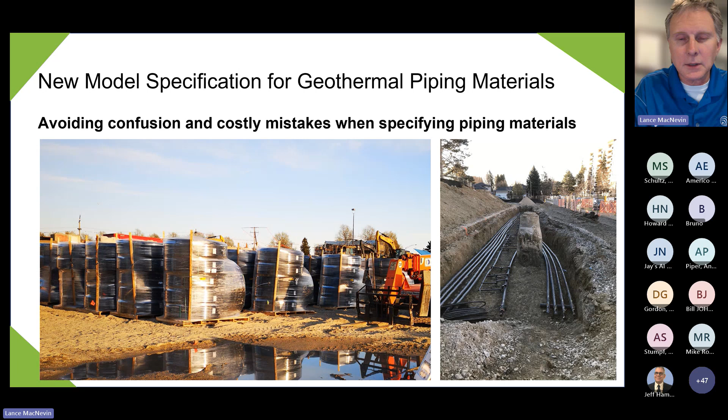Well, it can actually be pretty complicated. There's a lot of science and detail in pipes, and there's a lot of ways of specifying the pipes correctly. If you don't do it correctly, there is a chance that you get incorrect pipes put in the ground, which can obviously be very costly, almost impossible to replace sometimes, and could lead to premature failure if you don't have the right pipe in the ground. So that's kind of the background for this.

As Jeff mentioned, here's my specifications. I work for the Plastics Pipe Institute, which is a nonprofit trade association based in Irving, Texas. PPI has been around since 1950, before all of us were born. Our mission is to advance the acceptance and use of plastic pipe systems through research, education, technical expertise, and advocacy.

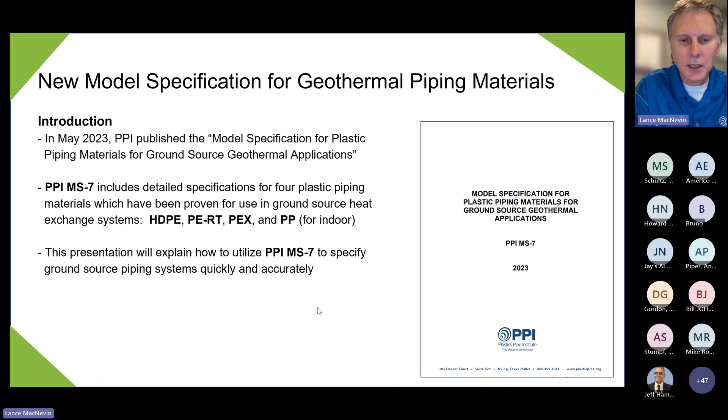As a bit of an introduction, what we're going to be talking about today is a new PPI document that published a year ago called Model Specification for Plastic Piping Materials for Ground Source Geothermal Applications. Hopefully the title is pretty self-explanatory. The official number of the document is PPI MS7, for Model Spec 7. That means we published 6 others beforehand. But this one is focused on the pipes that we're using in the ground for geothermal systems. So we're going to talk about why it's important to have a model specification and to use correct language, and then walk you through the document and show you how to actually use it correctly.

On our presentation outline here, we're going to start by focusing a little bit on the science and specifications of HDPE pipe, tubing, and fittings. We're going to first take a look at what the code requirements are for HDPE pipe, tubing, and fittings, and then delve into the standards requirements from organizations like ASTM, AWWA, CSA, and NSF, so that we understand how standards and codes and standard language work well together.

And then the fun part of this is going to be taking a look at some inappropriate or out-of-date piping specifications. These are real specifications used on projects in the last few years that, if you follow them literally, there might be no product that meets those requirements, or it may be very confusing in terms of which product to supply. So we'll take a look at those and point out what's wrong with them.

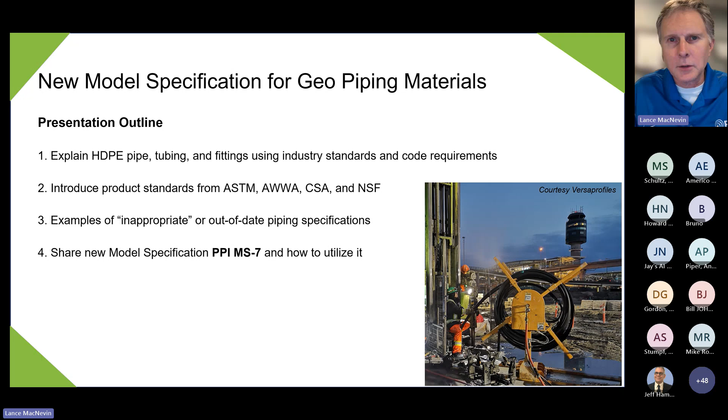And then finally, in item 4, we'll actually share the new PPI document and give you a tour of what's in there and how you can utilize it going forward, especially if you're a specifier or an engineer. But many of you are probably working with specifiers and engineers as well, and could share this information with them to make their life easier and your life easier too. So that's the plan—we've got these 4 items in the presentation.

So the first of these is we're going to be taking a look at the actual codes and standards, starting with the codes. You've probably all heard other presentations by different presenters describing what a code is, right? So this may be a little repetitive to some of us. But our definition today is that a code is a legally adopted document by a jurisdiction for the purpose of regulating a portion of the design and construction industry. So we have plumbing codes, fire codes, construction codes, mechanical codes, and then geothermal codes as well in some cases.

Most jurisdictions, whether that's my city, my town, or my state, don't have the capacity to develop their own codes, so they adopt model codes from big agencies like ICC, IAPMO, IGSHPA, or NRC up in Canada.

Some jurisdictions do develop their own codes, and sometimes that doesn't turn out for the best. They could end up being really out of date or ill-informed. So we generally encourage any jurisdiction to adopt one of the big model codes as their codes.

So the groups that write those so-called model codes are called code development bodies, or simply code agencies. Again, International Code Council is ICC, or the International Association of Plumbing and Mechanical Officials, that's IAPMO, and National Research Council of Canada, NRC, that adopts the construction codes for Canada.

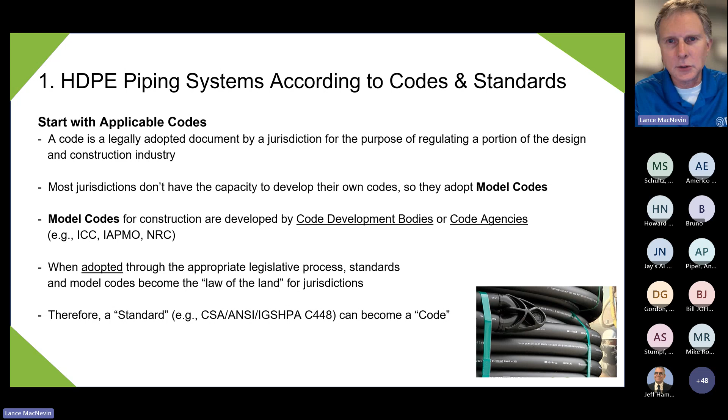So when a code or a standard is adopted through the appropriate legislative process, then the standards and model codes become the law of the land for the jurisdictions. And in some cases, something that's developed first as a standard, like CSA C448, can actually become adopted as a code when a jurisdiction, like a state or a county, says we're going to use C448 as the geothermal code for this territory. So that's just kind of an intro to codes.

In terms of what codes are out there for geothermal systems, there's primarily 4 of them in North America right now. There's the ANSI CSA IGSHPA C448, which Jeff was talking about, and Jeff is the chair of that committee within CSA, and we're looking forward to the new version being published soon.

And in the United States, we have the International Mechanical Code from ICC, and then IAPMO has 2 different codes that include geothermal content. There's the Uniform Mechanical Code and the Uniform Solar Hydronic and Geothermal Code that has a specific chapter just on geothermal systems. So we're going to take a look at each of these in detail.

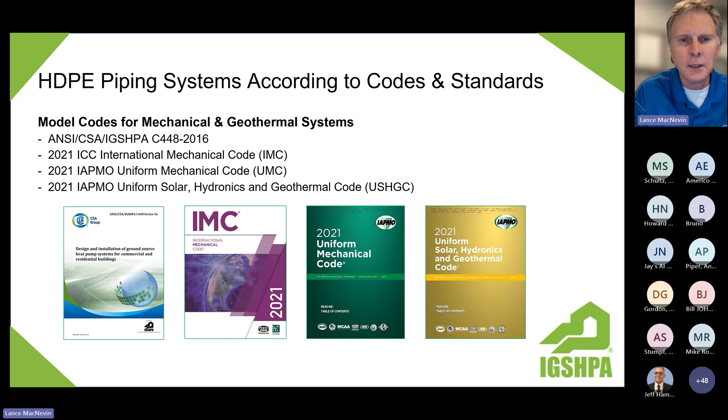For C448, it's the 2016 edition, still the current edition, reaffirmed in 2021. For the other codes, we're going to take a look at the 2021 edition in detail and see how those codes refer to piping requirements. This is kind of setting the stage for how model specifications should be arranged and written.

So if we go into C448, the current edition, and go to section 542 on polyethylene pipe and fittings, we'll see that the very first line says PE pipe and tubing shall comply with CSA B137.1 or ASTM D2737 or D3035 or these other 2 standards.

The code is actually referring to a standard. The code doesn't actually say exactly the dimensions of the pipe, or the strength of the pipe, or the marking requirements of the pipe, because all of those kinds of details are actually written in product standards, which we'll talk about in a few minutes.

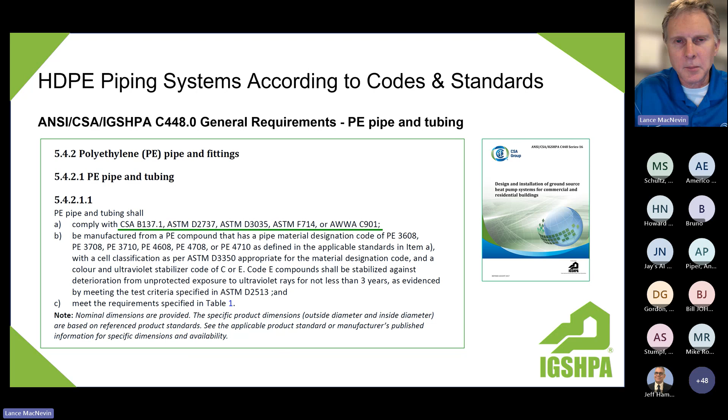So it's much easier for the codes to refer to a standard, select a standard for a pipe that's appropriate for the application, and say, as long as you use one of these standards for the pipes in this system, that will be appropriate and will meet the minimum requirements. So that's one example of code referring to a standard.

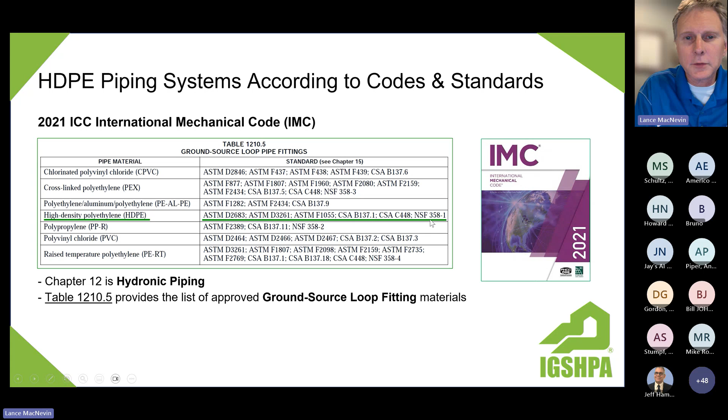So for HDPE, it also uses ASTM or CSA or NSF standards to talk about which fittings are approved for use with that polyethylene pipe that was in the previous table. So that's a way of kind of saying what parts you can use together.

And one of the IAPMO codes, this is the 2021 Uniform Mechanical Code. In this version of the code, it was actually Appendix F that was on geothermal energy systems. Table F104.2 describes the approved ground source loop piping — very similar table to the others that we looked at. For HDPE pipe, here are the standards that the pipe must comply with, and the pipe doesn't have to comply with all of them.

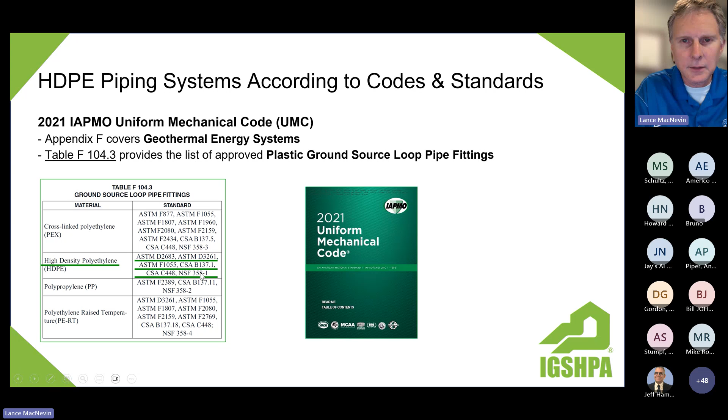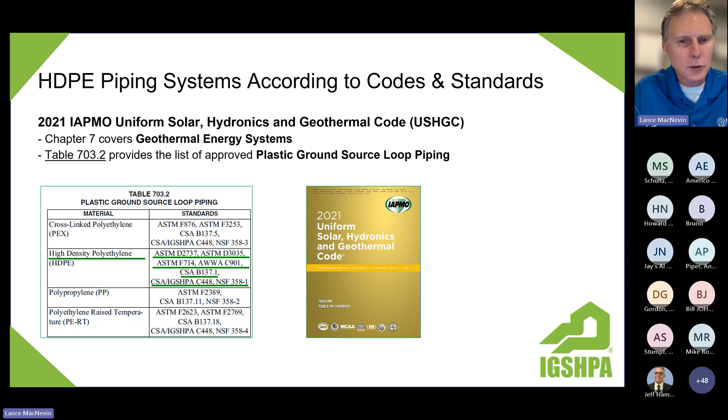And in fact, it can't. But the pipe has to comply with at least one of these. And then the next table, there's a table for ground source loop pipe fittings, again referring to different fitting standards. Then we have the other IAPMO code called the Uniform Solar Hydronics and Geothermal Code, the USHGC, and it has a table 703.2 for ground source loop piping. Again, it's referring to those standards for the approved pipes. And then it has another table for the fittings, which I'm not showing because it's kind of duplicative.

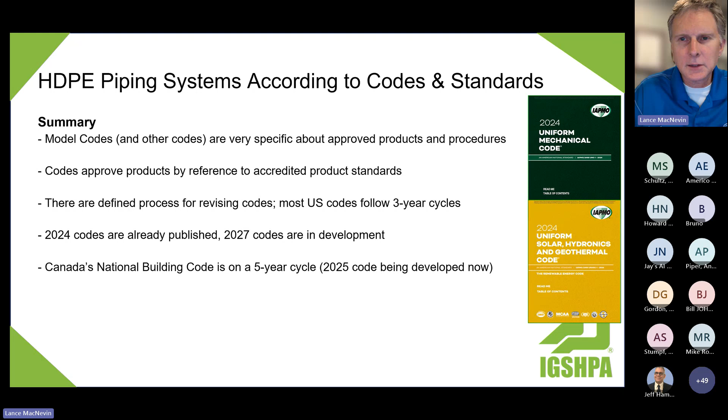But the main point of this first part of the presentation is that the model codes are very specific about the approved products and procedures that you're allowed to use. And the codes approve products by reference to the accredited product standards.

Now, these codes get updated. They're not locked in stone. In fact, most of the US codes get updated every 3 years. I was showing examples of the 2021 codes, but the 2024 codes are actually out and available for sale now, and some jurisdictions are starting to adopt them already. Believe it or not, a lot of us in the background are also working on the development of the 2027 codes. That work actually started last year. So it's a constant process. These codes are always in development and always subject to change. If you have a better idea for fixing something, there is a process for updating the codes.

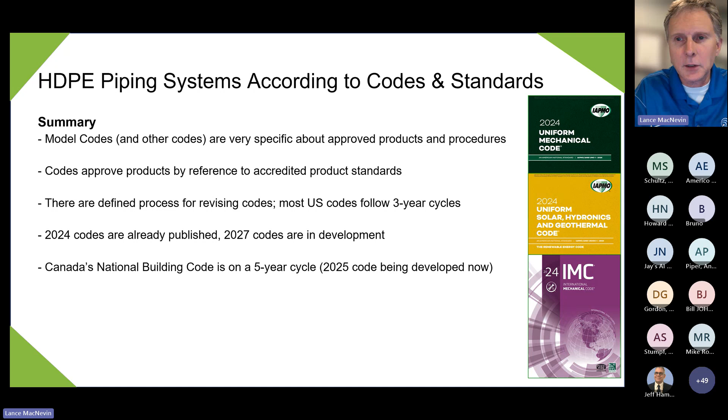So that was part one. Here's part two. Now we're going to dig into the product standards in a little more detail. This should be a little bit educational in terms of some of the details of the standards and why it's important to reference the right standard when specifying your pipe or fittings.

So the first question we often get is, well, where do these standards come from? Who writes them? The standards are actually produced and published by organizations that we generally call standards development organizations, or SDOs. Some examples of these SDOs for different types of products are AHRI, ASHRAE, AWWA for water systems, ASTM, CSA, IAPMO and ICC also develop standards, and NSF develops a lot of pipe standards as well. So those are the organizations that develop relevant standards here for geothermal activities.

Standards development organizations have to be accredited by somebody to confirm they're doing the job correctly, that they're open and transparent, and that they're not creating confusion in the marketplace. In the United States, the accreditation body for that is ANSI, the American National Standards Institute. In Canada, we have the Standards Council of Canada, SCC, which accredits standards development organizations to make sure they're developing useful standards in a correct manner, and also that two different organizations aren't developing completely identical standards that would compete with each other, because that can create confusion in the marketplace.

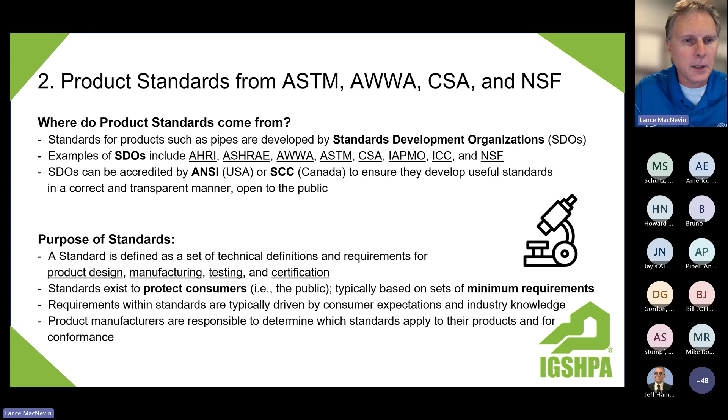And those minimum requirements are driven by various factors. They could be driven by an organization like IGSHPA that says we need pipe that's going to last and not collapse, that can't dissolve in water, and has to be resistant to antifreeze products. The standards requirements can also be driven by the public, the people who buy the pipes and have their own expectations, and by the manufacturers who know what's capable of being produced. Manufacturers are always trying to raise the bar as technology improves. These standards are literally being improved on a regular basis to make them tighter and better and increase requirements as technology improves. So there's a lot of motivation to keep updating the standards, and that's another reason why it's important to always know the latest version, because they always get better. That's also driven by competitive reasons too.

So if we look at the list of the HDPE pipe and tubing standards that we saw in the codes a minute ago, you saw all these numbers like ASTM D2737.

Well, you can look that up online. And if you want a copy of ASTM D2737, you can buy it. ASTM's main business is selling standards developed by its committees. You could go online right now, or wait till my presentation is over, and purchase a copy if you want to see all the details of what's in D2737 or D3035 or F714 or AWWA standards or the other standards. They're all available to anybody with a credit card who wants to purchase and own the standard.

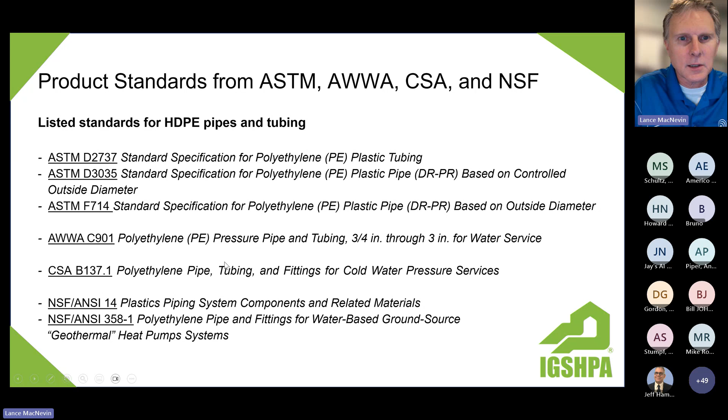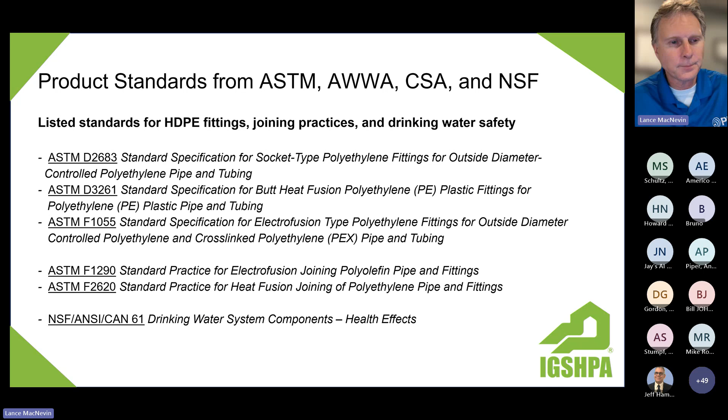Now the question often comes up: who is actually writing these standards for plastic piping systems? Does ASTM include thousands of engineers that know how to write all these standards? Well, yes, they do, but they're not employees of ASTM or AWWA or CSA. The people that write the standards are actually technical committees of volunteers, people from industry or the public who volunteer to join those organizations and to contribute and collaborate in actually writing these standards.

And this has been going on for a long time. ASTM is now 126 years old. The first standard ever published by ASTM was for steel rails in railroad rails, standard A01. 51 years ago, ASTM formed a committee called F17, which was focused on writing plastic pipe standards. That committee has about 750 people today, and that's the ASTM technical committee that writes standards like the ones we were talking about here today.

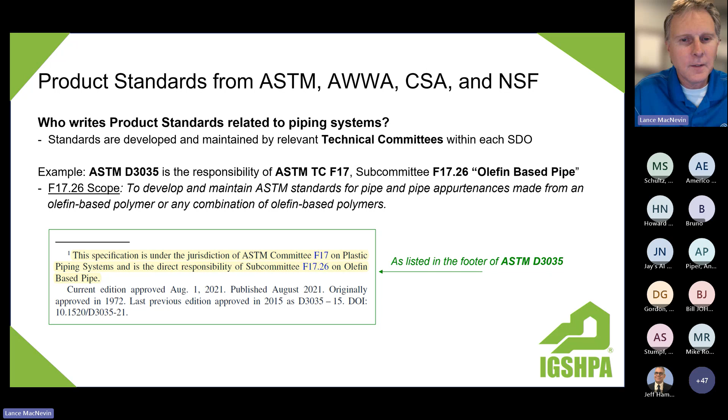Within ASTM, they have subcommittees that focus on different types of pipes, because the people who are experts in polyethylene pipe are probably not also experts in PVC pipe or drainage pipes or something else. So there are different committees for different types of pipes for different applications. For example, in the box here, I'm showing the footer of ASTM D3035, a really common polyethylene pipe standard. At the bottom of that standard, it tells you this specification is under the jurisdiction of Committee F17 and the subcommittee F17.26, which is the name of the subcommittee that actually prepares this standard. It also tells you when the standard was originally approved—in this case, 1972. So D3035 has been around for a very long time. And it also tells you about the latest edition.

So that gives you a little detail on where the standards come from, I hope. Mostly they're black and white standards, except some have fancy color covers. But here is a list of the common standards we have for HDPE piping systems. Sometimes people will refer to the AWWA standard called C901—that's the American Water Works Association—versus the ASTM standards that we normally use. ASTM used to be known as the American Society for Testing and Materials, and now they just go by ASTM International, but that's where the acronym comes from.

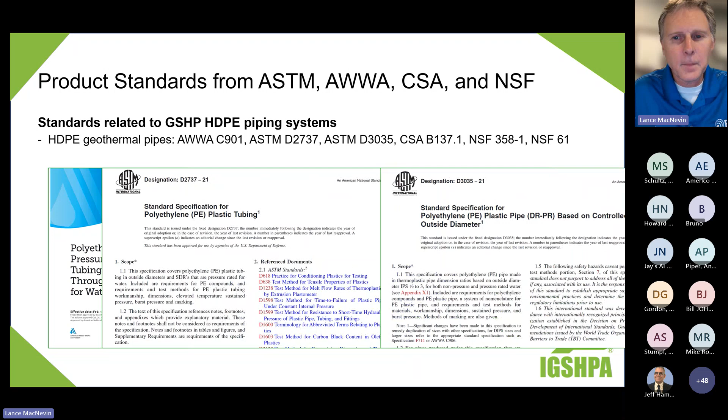So they have standards like D2737, which is for PE tubing. D3035, which I've been talking about, is for outside diameter controlled pipe. Then we have CSA standard B137.1, which is also for polyethylene pressure pipe and tubing. And there's NSF standard 358-1, specifically for polyethylene pipe and tubing for geothermal heat pump systems. And sometimes we'll be talking about NSF 61, which is the standard that requires components to be safe for drinking water contact.

Now, to take a closer look at one of these standards and get an appreciation of what's actually in there, I've got a few slides about D3035 in terms of what's in the guts of the standard. So here's kind of the cover page of D3035. This is a standard for OD controlled polyethylene pipe. And the scope tells you what it's for.

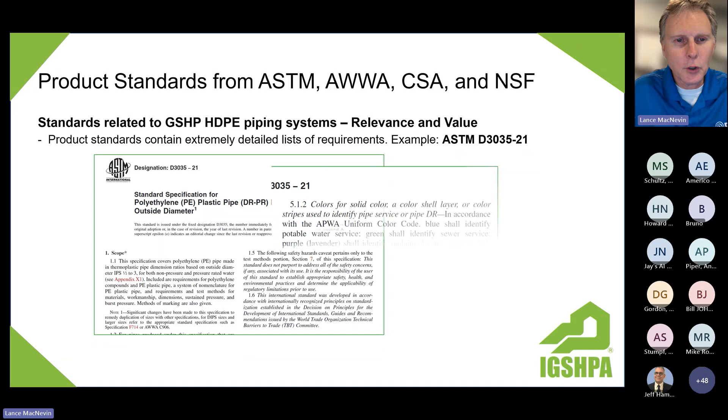If you look inside, if you look at table 2, for example, this is for IPS size pipe, meaning iron pipe size pipe. This is the table for outside diameters and tolerances. So if you're wondering what is the outside diameter of any of these pipes, that's defined in the standard. And look at these tolerances.

Like for IPS size 1, the outside diameter is 1.315 inches, but the tolerance is plus or minus 5 thousandths of an inch. A piece of paper is about 4 thousandths of an inch. A human hair is about 4 thousandths of an inch. So that's the tolerance that the manufacturers have to make pipes correctly to a standard like this.

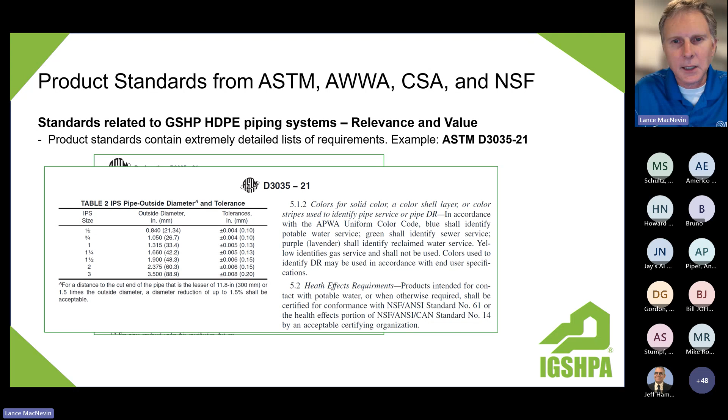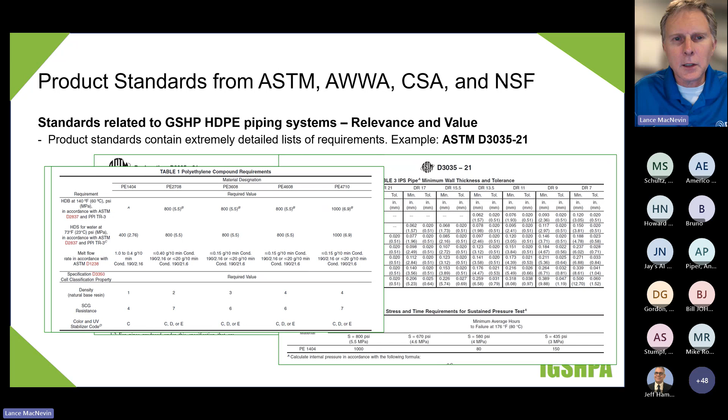Very tight tolerances. There's a separate table in here on the minimum wall thickness. So you have all these different dimension ratios of plastic pipes available, DR11, DR9, DR17, and it's pretty small text on the screen here. It's hard to read, but the exact tolerances for the wall thickness is also specified in the standard. A lot of the material properties are specified in the standard.

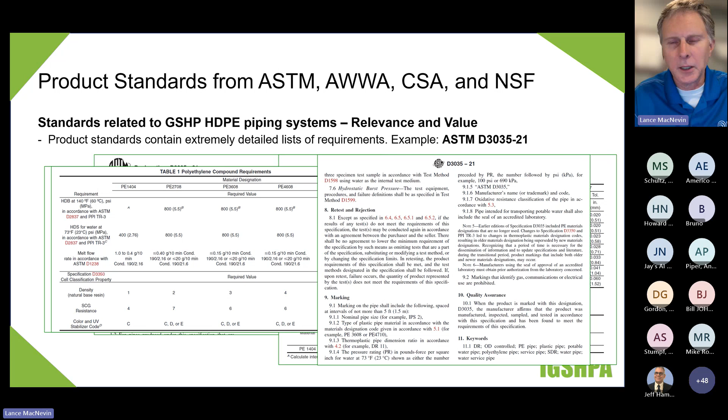And on this section here, if you can read section 9 at the bottom, that's on markings. So the exact marking requirements are also specified in the standard. And again, these are all minimum requirements. People can put more in the markings if they want to, fancy logos and stuff like that. But at the very least, they have to put what's specified in the standard on their pipes. So there's a lot of requirements in here.

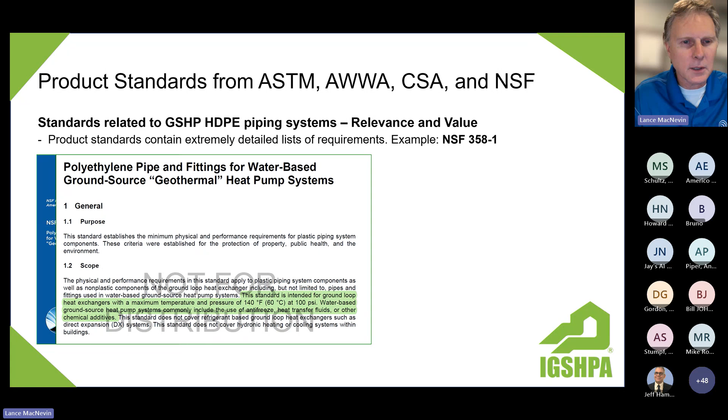Similarly, the NSF 358-1 standard exists to be a special standard for geothermal pipe because it also includes special requirements for compatibility with antifreeze products. So this is just the scope of NSF 358-1. And you'll find that most of the geothermal pipe on the market today will be certified to an ASTM standard and also certified to NSF 358-1.

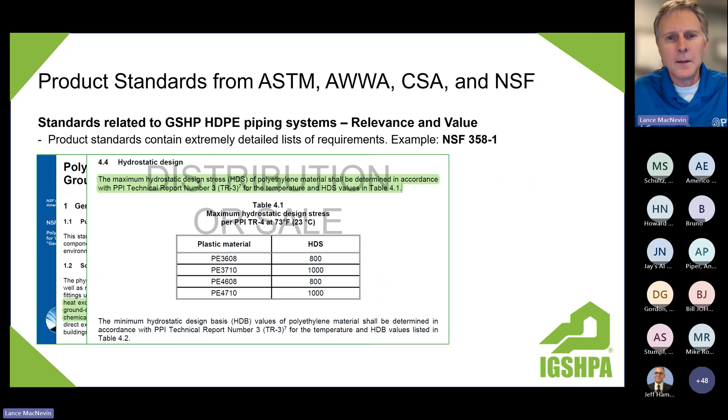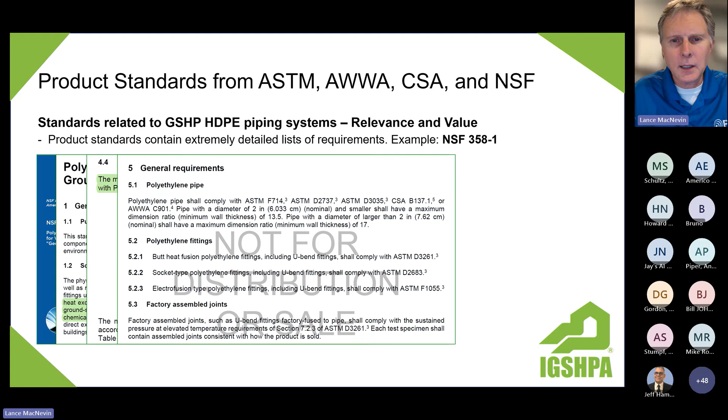358-1 has strength requirements, and for dimensions, it refers back to the ASTM or CSA pipe standards in the first place. For the fittings, NSF 358-1 talks about the fittings and how they have to meet specific standards, like we talked about earlier. And then it even has a special section on chemical resistance.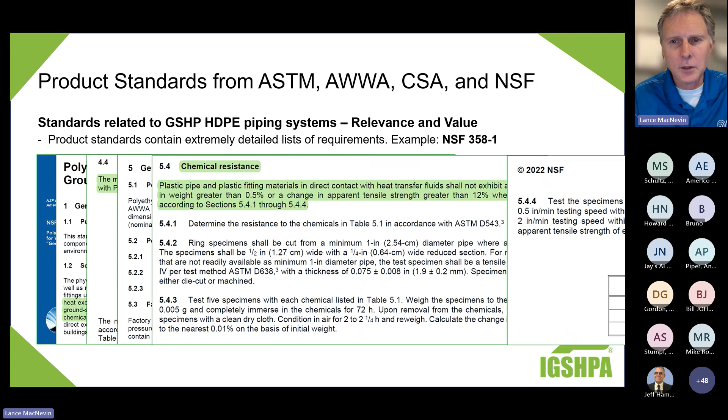So if you have a polyethylene pipe certified to NSF 358-1, that means that pipe has gone through the chemical resistance test with different types of antifreeze products to make sure that the pipe is resistant to those antifreeze products. So there's a lot of, and here are those antifreeze products here, ethanol, methanol, and propylene glycol. So there's a lot of really specific requirements in this standard as well.

I'm not going to spend a lot of time on material properties today, simply in the interest of time. But if anybody would like a copy of these slides, I'm happy to distribute them to IGSHPA for sharing, or anybody can send me an email, and I'm happy to send these slides out to you.

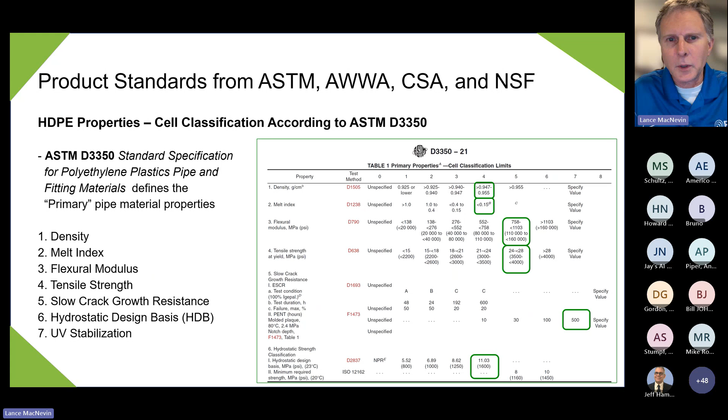Because there's a couple of slides in here with details of exactly what is meant by a cell classification number on polyethylene pipe. And there's actually a table for this in a different ASTM standard that talks about exactly what is the density range and the melt index and the flexural modulus. So for polyethylene pipe materials, the material used to make that pipe, there's a lot of requirements even for the materials as well.

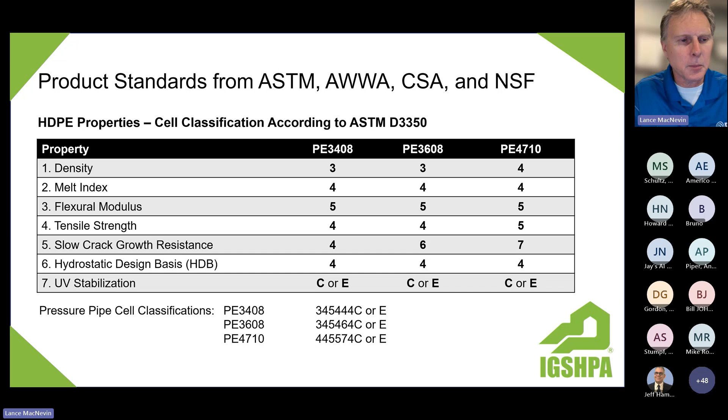And those requirements actually get spelled out in a number called the pipe cell classification. So in most polyethylene pipe, if you read the pipe print line, you'll probably see the number like PE 4710, but you'll also see a number like 445574C. And in the 445574, each of those digits refers to a property in the pipe. And those properties are listed in this table here. But the PE4710 part is typically what people talk about.

And in the old days, we had 3408. And then for a while, we had a product called PE3608. And there's still a little bit of that still exists. So what do those numbers mean? Because those numbers aren't the same as a cell classification. These are 4-digit material designation codes, is what the designation like PE4710 is called, a material designation code.

And it's defined in an ASTM standard called F412 that the first digit refers to the cell classification number for the density. So a bigger number means higher density, higher strength. The second digit refers to the cell classification number for slow crack growth resistance.

And that means the resistance, or the ability of the pipe to resist cracks even when you get a gouge or a scratch in the pipe. The old 3408 pipe, that was its biggest weakness. If you got a scratch or a gouge in the pipe, under constant pressure and ground movement and things like this over time, those little cracks could turn into bigger cracks.

But today's polyethylene pipe, like PE4710, it's literally 100 times or more better than the old pipe in terms of resisting crack growth. And the third and fourth digits of PE4710, that's a shortcut of 1000, and that refers to the hydrostatic design stress of the material.

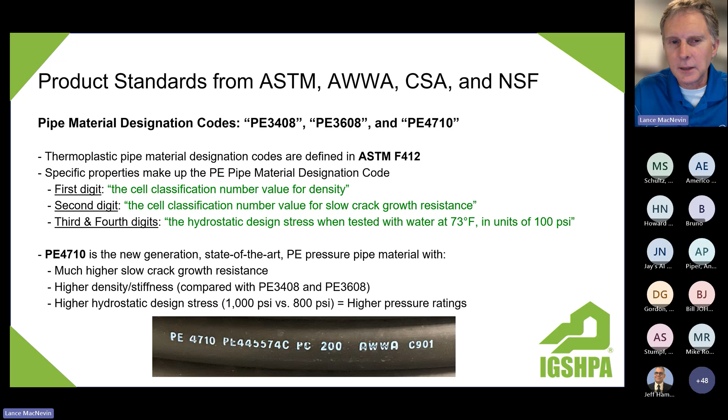So all of those numbers actually mean something, and it's really important to use them correctly so that you get the pipe that meets the requirements that's needed.

So to wrap up this part of the presentation, hopefully you have a little bit of better appreciation of what's in a product standard now, and how important it is to actually specify the latest version of these product standards, because they really include a lot of detailed requirements. And in fact, I think anybody who reads a product standard will be thoroughly impressed by how high the requirements actually are for these pipes and fittings, and the materials and all the testing that's required.

And the truth is, the companies that make plastic pipes and fittings have to spend tens of thousands of dollars every year on internal quality control, but on third-party certifications as well. In fact, a lot of companies are spending hundreds of thousands of dollars a year on quality control and annual certification testing to make sure that the pipe is meeting the standards. And you have to test things to failure, so sometimes tests take a really long time to get these pipes to fail.

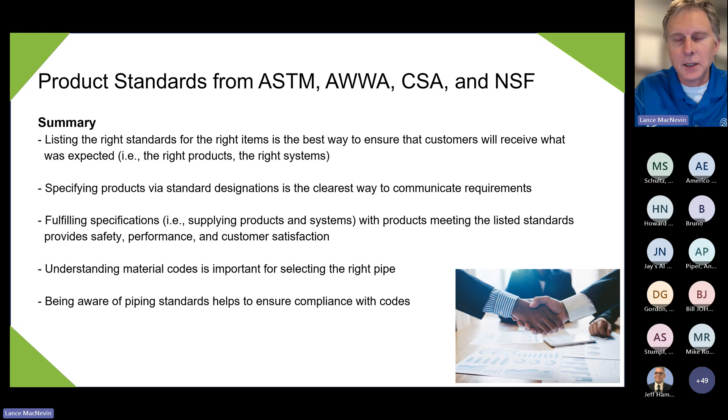So now we're going to move into part 3, which is examples of inappropriate piping specifications. We're going to look at some real specifications and then point out what's wrong with them, as a way of saying, well, here's how you could do it right, to avoid these problems.

And the concern, and you've probably all seen this, is that bad specifications could refer to inappropriate product standards. And then that causes confusion because the manufacturers, the people asked to supply the pipe, aren't sure which kind of pipe is really intended here for this project. So the wrong products might actually get supplied and installed.

And in some cases, the product specification might refer to an old specification that is really inadequate compared to today's specification, when the bar is far too low. And maybe it's a product not even in production anymore, so everybody's just kind of guessing, what are they really looking for here? But in a lot of cases, what we see is engineers are kind of making up their own specifications.

With a little bit of this from one standard they read, and a little bit of this from another standard they read, combining it in a way that they're trying to get the best of the best in one specification. And that's what Dr. Frankenstein tried to do in the story—get the smartest brain and the biggest arms and the fastest legs put into one person, but it turned out to be a monster, right? And sometimes that happens when people try to do this by mixing and matching and building their own specifications. They come up with language for which no product can actually comply.

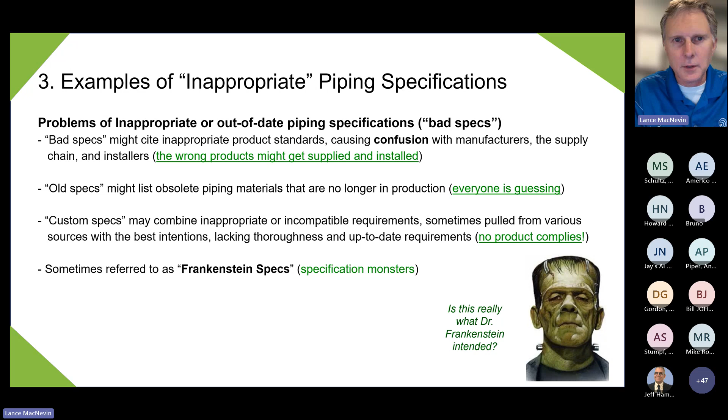Monster specifications. So here's some examples of specifications that are real, but they're just not right for specifying geothermal pipes. So this is one here. No names are going to be given—I don't know who wrote these. They were given to me anonymously, so hopefully it wasn't any of you.

On this specification, under geothermal ground loop piping, for the ASTM standards, it lists ASTM D2513. Well, that's a gas pipe standard. And gas pipe doesn't even have to be high density polyethylene. Gas pipes are really low pressure in a lot of cases, and they can use medium density polyethylene. So it's not appropriate to use a gas pipe standard for geothermal piping requirements.

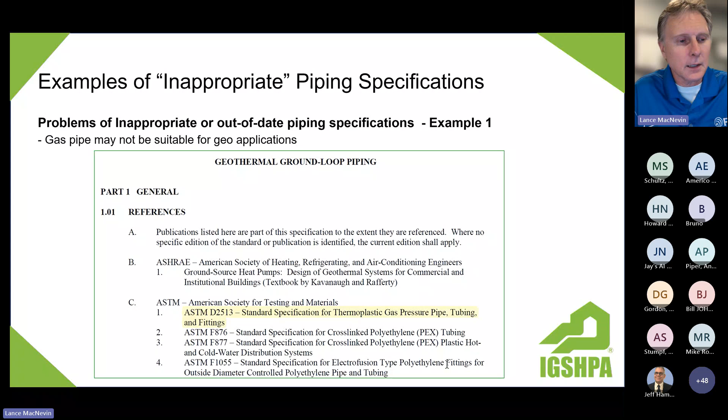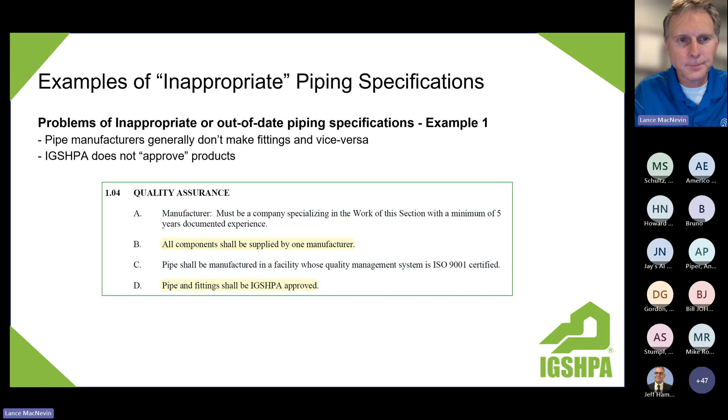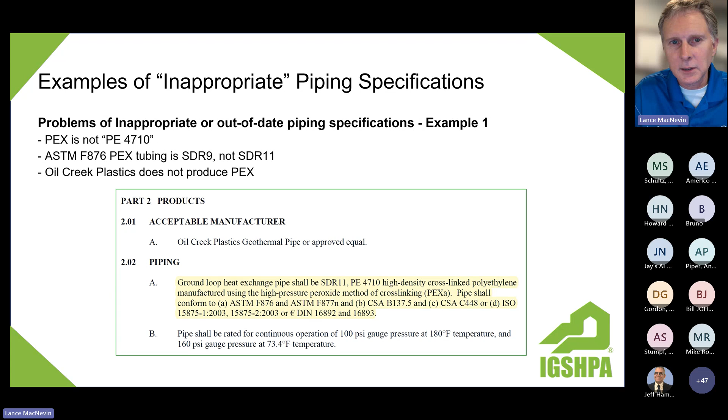On this specification, there is a particular manufacturer listed. And it says the ground loop heat exchange pipe shall be SDR11 PE4710. Well, that's fine. But then it says it shall be crosslink polyethylene pipe, PEX-A type. So it can't be PE4710 and PEX-A at the same time. That's like asking for apples and oranges to be mixed together. So that's just inappropriate. And the company Oil Creek Plastics doesn't even produce PEX, so we have no idea where this language came from.

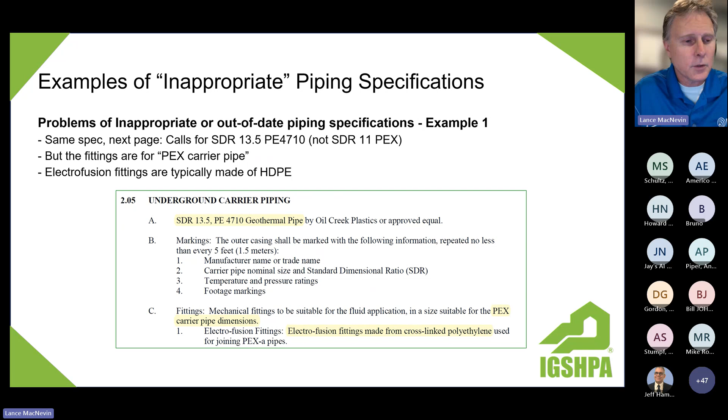And then in the same specification, next page, it says the piping shall be SDR 13.5 PE4710. Well, that's okay, that exists. But then down below under letter C for the fittings, it talks about the PEX fittings, and says the electrofusion fittings shall be made from PEX, and those don't exist either. So it's really a mix of different things.

This is a different example specification. You can see it's a different format, different layout. In section 0.2, it says the geothermal piping shall be manufactured from virgin HDPE resin. Well, it's okay to say that, but you don't actually have to, because that's already a requirement in the standards that all HDPE pressure pipe is made from virgin resin. You're not going to get any recycled product mixed in with your HDPE pressure pipe, so that kind of goes without saying.

But with 0.7 and 8 down below, especially 0.7, there's a bit of a problem because it says the pipe shall have a nominal diameter of 32 millimeter or 1.25 inches. From all those product standards we looked at earlier, from AWWA, ASTM, and CSA, none of them include a 32 millimeter pipe. Even CSA standards in Canada use the same nominal pipe dimensions like 1, 2, 4, and 6 that we use in the US and ASTM standards. So if you really want a 32 millimeter pipe, you're going to have to use an ISO standard and specify some metric pipe coming from Europe or Asia. It just doesn't exist in North America.

And then down below, the pressure rating, the KPA rating and the PSI rating, don't actually match each other. So that's just a bit of a technical error there.

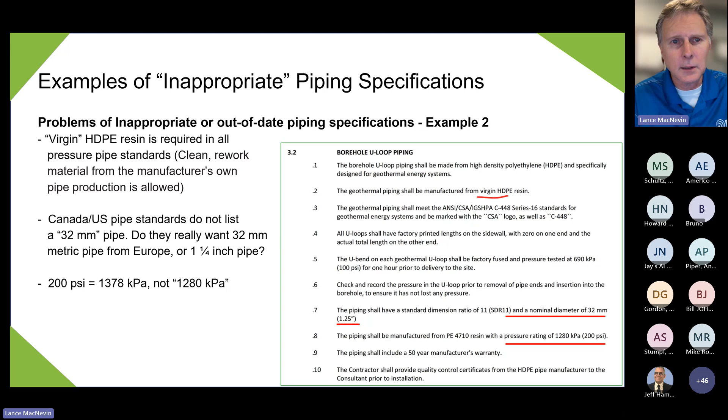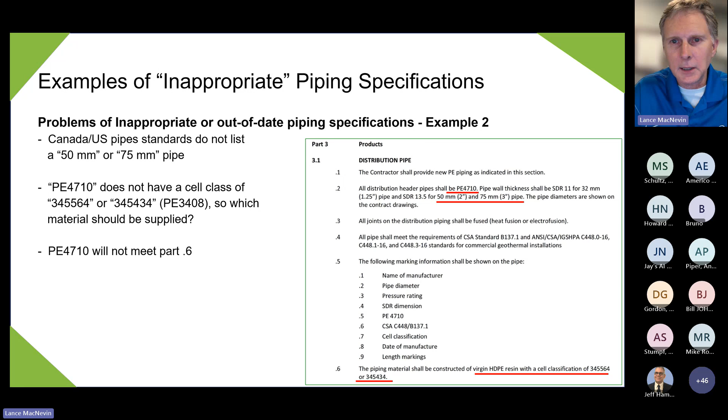On the same example, on the next page, it says all distribution header pipes shall be PE4710. Well, that's fine, but again it calls out the metric dimensions. The Europeans aren't using PE4710 material, so it's going to be practically impossible to get a 50 millimeter PE4710 pipe. And then down below at the bottom of the page, they're actually talking about the virgin resin with cell classifications that don't match PE4710. Those cell classifications are really low grade polyethylene materials, lower spec than PE4710. So you can't really do both at the same time.

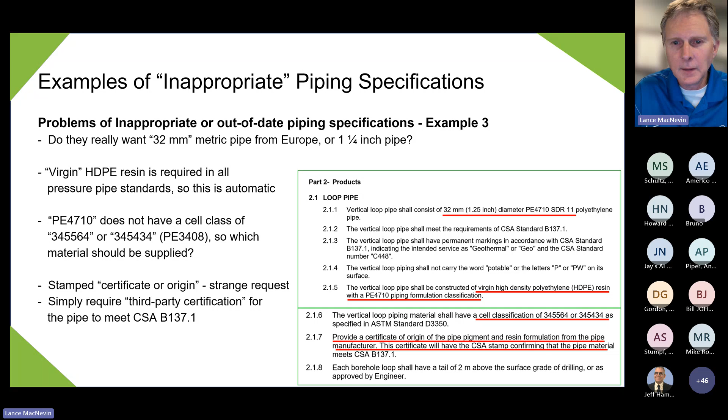Here's another example, again where they're calling out 32 millimeter pipe. Same problem there. They're also asking for virgin pipe material, which you get without asking, you don't have to ask for that. They're also asking for the low-grade cell classifications, which are much lower than PE4710 material, so that wouldn't be a very good quality pipe if you asked for 345, 564. And then it's also asking for a certificate of origin of the pipe pigment and resin formulation from the pipe manufacturer with the CSA stamp confirming the pipe material meets the standard. CSA doesn't do that on the material, and that would be a really difficult thing for a lot of pipe manufacturers to provide.

So hopefully with those examples, we've clarified how easy it is to make a mistake. It is really easy, with all the best intentions, to specify something that just doesn't exist, or specify something that is confusing. So if you're asking for low-grade cell classification and PE4710 at the same time, it can get very confusing for people to decide what do they really want here.

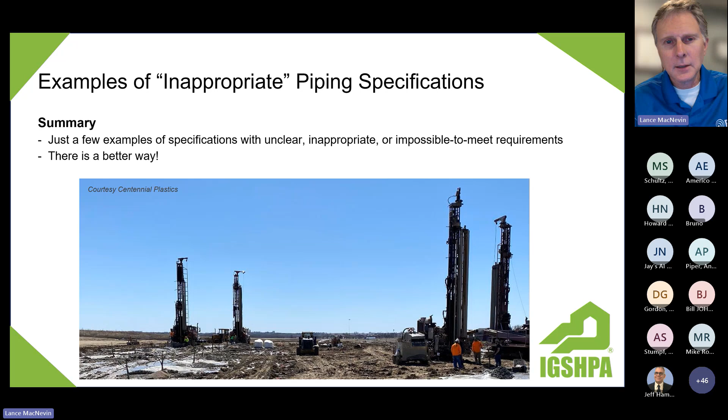So to try to move forward here and make it easier for people to prevent making those mistakes, here's our suggestion: just copy our language. That was the reason that PPI put together this model specification last year called MS7.

As I said at the beginning, this was published in May 2023, and it actually includes the latest current language for how to specify different pipe materials, specifically HDPE, PERT, PEX, and polypropylene. It has the very specific correct language. If you want to specify any one of those materials, we recommend that engineers simply copy and paste language from this document.

The document is a free download, like all the PPI publications. They're free downloads from our website. You can download it as a PDF file and copy it there. Or if it's easier, if somebody wants a Word version of the file, you can send me a request and I can send you that too.

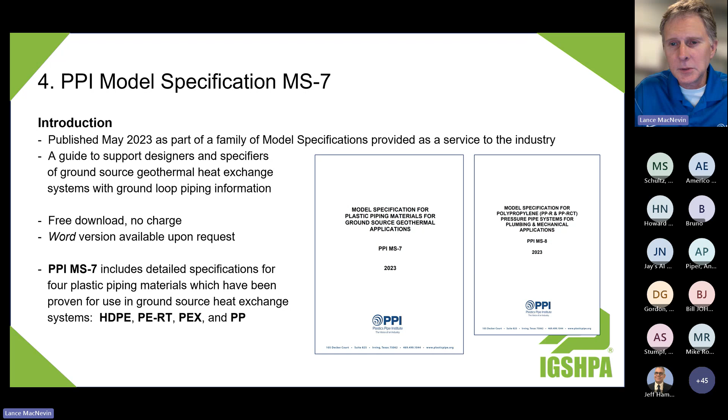You'll see on the right-hand side of this slide, we also have another PPI model specification called MS8, and that's specifically for polypropylene piping systems. So we do publish a series of model specifications, now we have 8 of them. But MS7 is the one we're focusing on here.

So we're going to take a look at the table of contents. You can see there's a lot of content in here, but it's organized, we think, in a pretty logical way. Section 1 is all the introductory stuff. It includes reference standards, definitions, and warranty requirements. Section 2 is all on the piping products.

There's a section on polyethylene pipe, which is the predominant pipe material. But there's also a section on PERT pipe, which is polyethylene of raised temperature, and a section on cross-linked polyethylene pipe as well. Then there's a whole section, chapter 3, on piping installation. And section 4 on indoor piping products. It's often appropriate to use polypropylene pipe for indoor piping, like headers or manifolds on the wall.

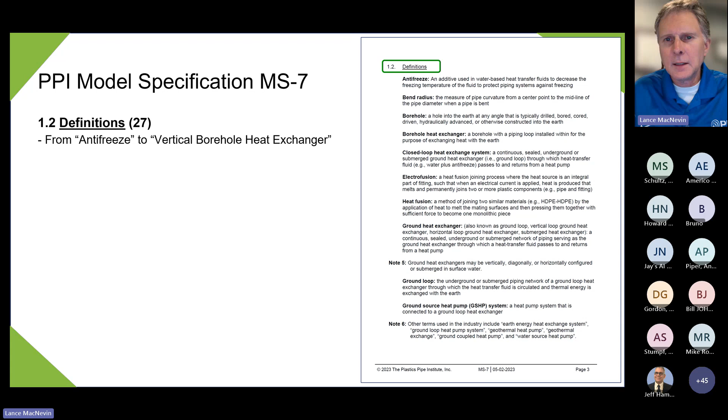Giving a quick tour of this, section 1.2 is on definitions, and there's actually 27 different definitions in here, everything from antifreeze to vertical borehole heat exchanger. These definitions, you'll find very similar definitions in the IAPMO codes and in CSA C448. So we didn't necessarily create new definitions, we're not trying to do that. We just want to make sure that the terminology used in this document is clear to everybody.

Section 1.3 is on reference standards. So again, if you're calling out that the pipe must meet ASTM D2774, you see exactly what D2774 refers to: standard practice for underground installation of thermoplastic pressure piping. That's just one example.

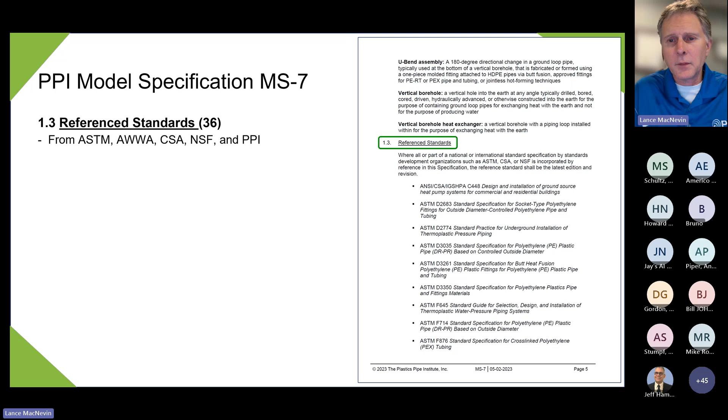Section 2 is where we get into the exact language for the piping. As I said, there are 3 different ground loop piping materials listed in here, and specifiers have the option. Most people are using HDPE pipe, so you can just go straight to the HDPE pipe section if that's fine. But if you need a higher temperature system or other special properties, you can use PEX pipe or PERT pipe, which have specific sections in MS7 as well.

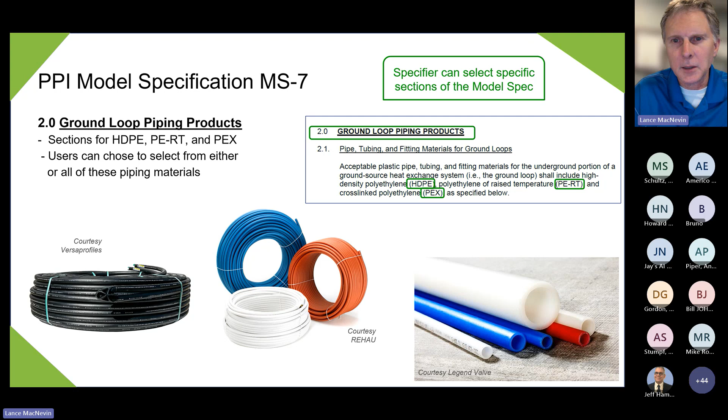The main reason to use those other pipe materials, which are both more expensive than HDPE, is they have higher temperature capabilities. So if you're dealing with a system that has higher than normal fluid temperatures going through the pipes, you might want to look at one of those other piping materials. They also have, especially with PEX, really good stress crack resistance. If you're in very rocky soil, PEX may be the best choice. PEX also has pretty extraordinary chemical resistance. So if you're in an area with contaminated soil and the manufacturer of the polyethylene isn't sure if the pipe will withstand that contamination for many decades, PEX may be the preferred material.

But most of the time we're talking about polyethylene. In the section here on polyethylene, section 2.2, we have 2.2.1 on HDPE pipe and tubing. Again, it's laid out with reference to the standards. In letter A, the pipe, according to our language, has to be certified to the requirements of one of those standards. In letter B, we call out that it shall be PE 4710 material.

That's the highest grade material available for polyethylene pipe today. In letter C, we're saying the pipe shall be listed by the Plastic Pipe Institute's Hydrostatic Stress Board. That's a third-party listing, the TR4 listing, to show that the long-term hydrostatic strength data has been validated and approved by that PPI department. We also require that the pipe is certified to the requirements of NSF 358-1, the standard we mentioned earlier that includes extra testing for chemical compatibility.

Our specification also requires that the pipe is certified to the requirements of NSF ANSI CAN 61, which is the drinking water health effects standard, to make sure the pipe won't contaminate any drinking water. Although we're not passing drinking water through a geothermal pipe, in many cases our geothermal pipe is passing through our drinking water because it's installed in the ground through aquifers. So whatever pipe you put in the ground through drinking water sources can't contaminate that source. That's why it's a good idea to have the pipe certified to NSF 61.

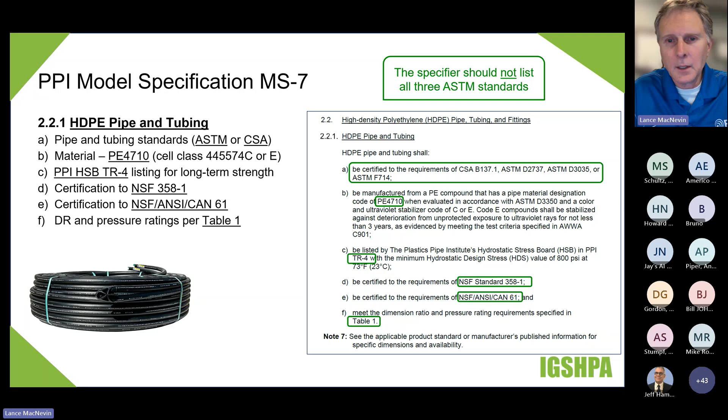So a lot of requirements in there. There's also a table of minimum pressure requirements and minimum standard dimension ratio requirements. This table is fairly easy to use. For vertical systems, our recommendation is a minimum SDR of 13.5. It used to be a minimum SDR of 11 in old specifications, and 13.5 pipe is thinner than SDR 11, but we feel that's suitable now with 4710 material.

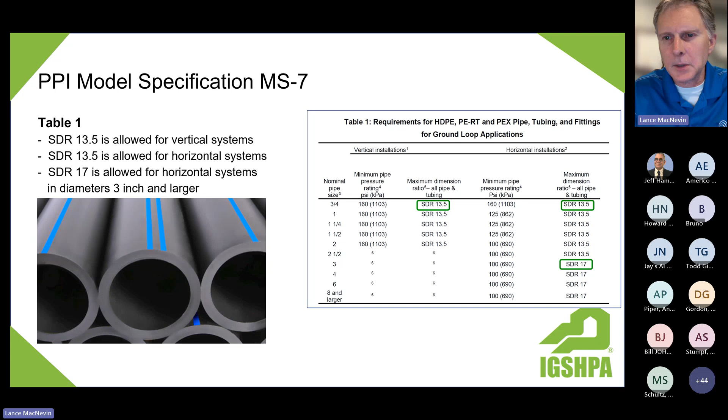Running out of time, almost done. Was that the comment? On pipe and tubing. We're still good, Lance, we have about 8 minutes left. Okay, good, thank you, Jeff.

There's also very specific language in here for the fittings. There are 3 different fitting standards listed. If you're going to use socket type fittings, make sure they're made to ASTM D2683. If it's butt type fusion fittings, make sure they're made to D3261. And if they're electrofusion fittings, make sure they're manufactured to F1055. So those are called out in here.

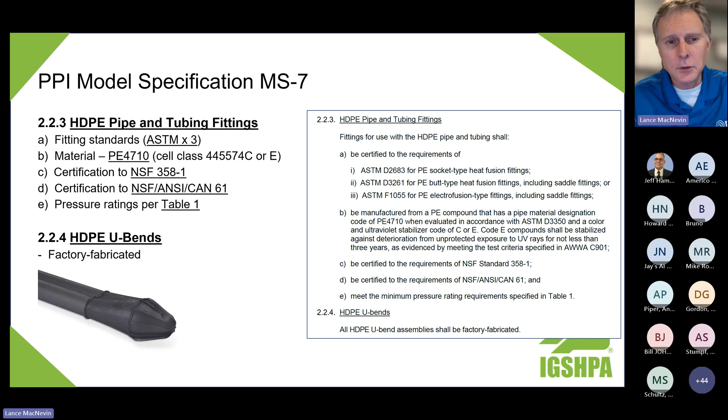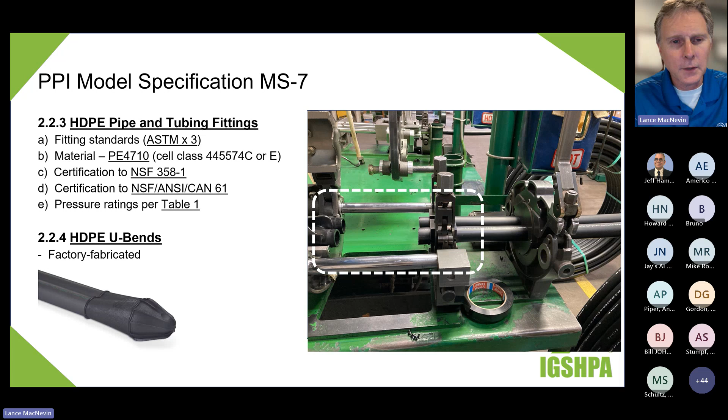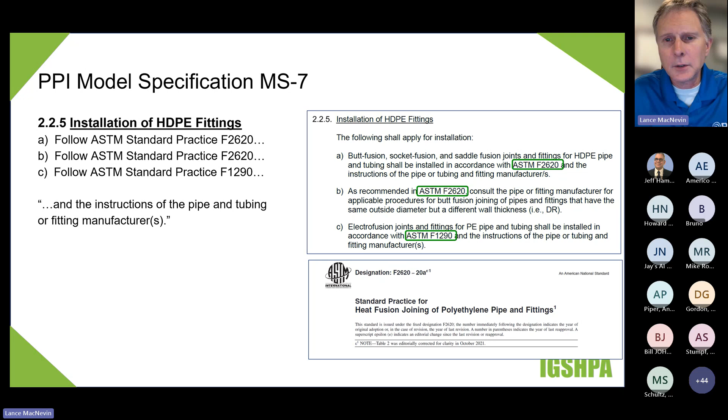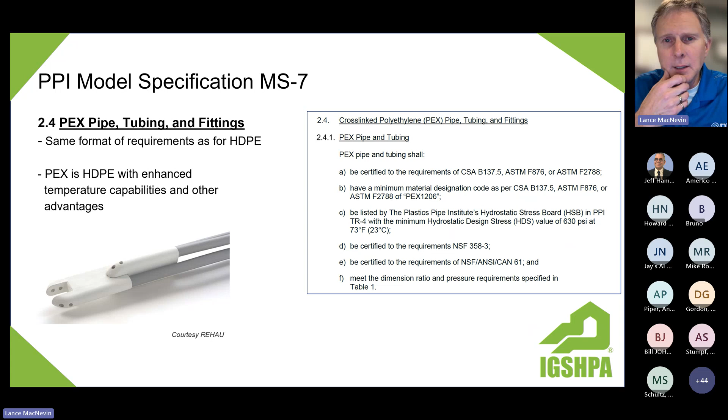There's some other details here about the installation of the fittings, again referring to the ASTM standard practices to make sure the fittings in the field are installed correctly. ASTM F2620 is important. There's also a section on PERT, and a section on PEX pipe. We won't get into that in detail right now, but all of that content is in there as well.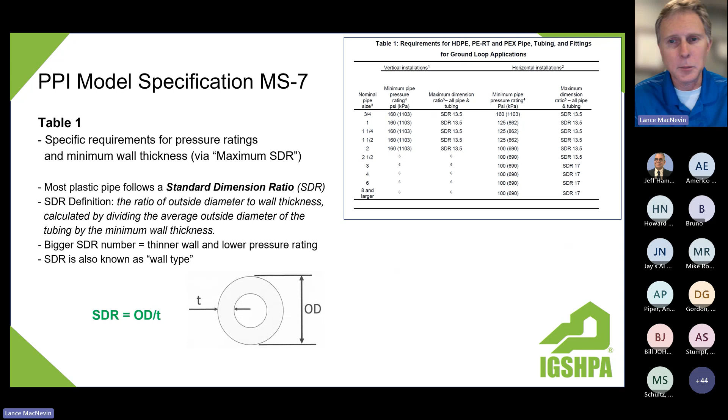Back to this table, when I was talking about the minimum SDR for pipes in vertical or horizontal installations, just to be clear what SDR means - it stands for standard dimension ratio, which is a ratio of the outside diameter to the wall thickness. The smaller the number, the thicker the wall, the stronger the pipe, and the higher the pressure rating. So an SDR 11 pipe has a thicker wall and therefore higher pressure rating and more mechanical strength than an SDR 13.5 pipe or an SDR 17 pipe.

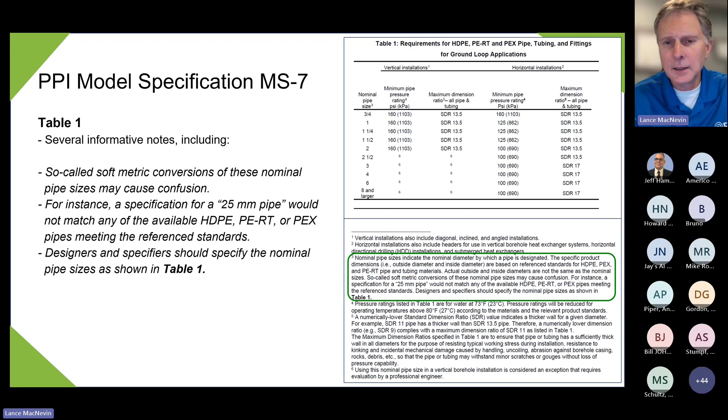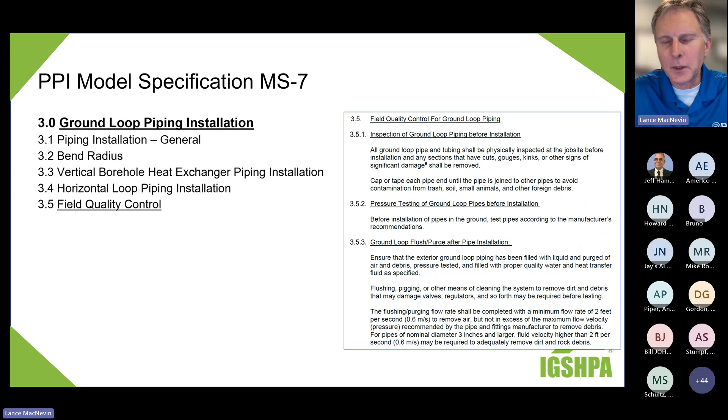There's installation content in here, but a lot of this installation content you're also going to find in the new edition of C448, which is out for public review right now. We really recommend people take a look at that in the public review process - it's going to be a fantastic standard when it comes out. I'm not going to get into the details of this stuff because when the new version of C448 comes out, we're going to update the installation section here to make sure it complies with C448, since it has actually evolved beyond what we recommended a year ago.

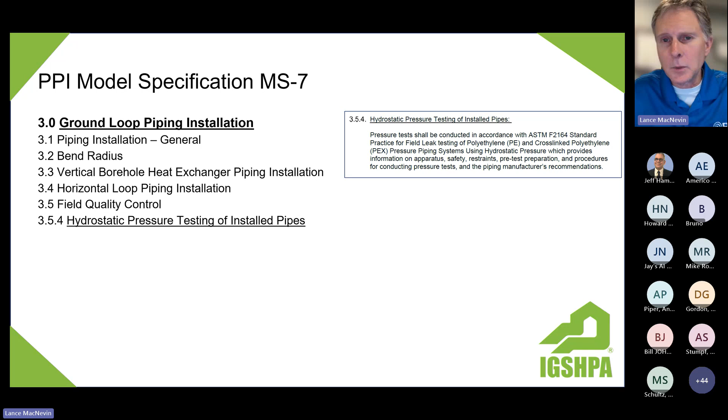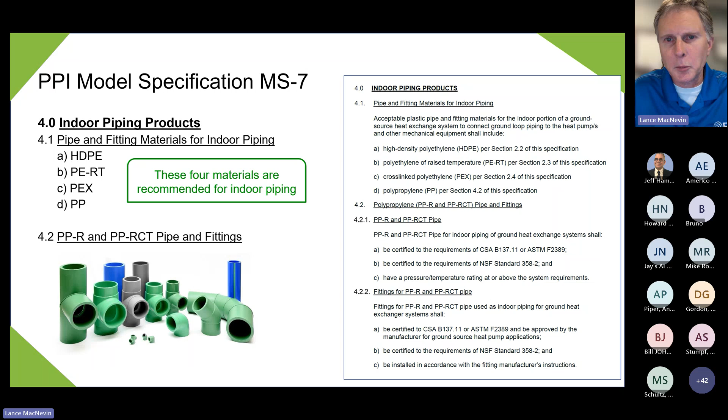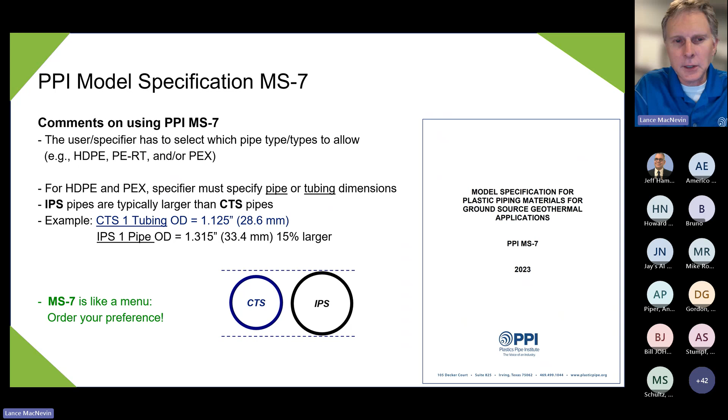Both these products exist in the marketplace, so if you're the specifier, you just have to be really clear as to whether you're asking for pipe or tubing. The green note here says MS7 is kind of like a menu—you can specify whatever you like. So we want your feedback on this document.

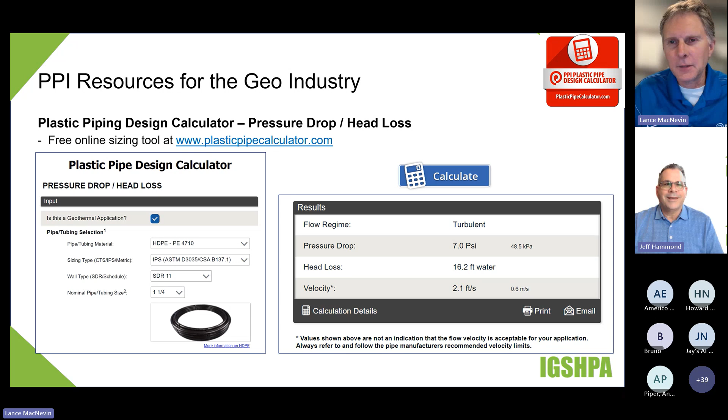Okay. All right. I don't see any other questions here, but I do have one question for you, Lance, if you have a moment. Sure.

When the designer or engineer uses the MS7 specifications, they can copy and paste that, you mentioned. When they format it into their existing specification for the building and the ground heat exchanger and so forth, do you have any suggestions for how they would put the MS7 into a CSI format so that their numbering system fits their other specifications? Good question.

No, I don't. We started looking at the CSI format a couple of years ago when we were developing MS7, and we recognized that wasn't our expertise. We would have had to get outside help to figure out how to reorient it that way. So we went ahead and published it with our own numbering system. Right now we don't have a mix-and-match guide to say here's where it goes into section 1303 or whatever. So yeah, I can't help with that at this point.

Well, that might be something where IGSHPA and PPI could work together on that type of arrangement. Absolutely. That would be great.

One more question, and then we'll have to call it good. Christos asks for your opinion on PERC. I'm not familiar with that material.